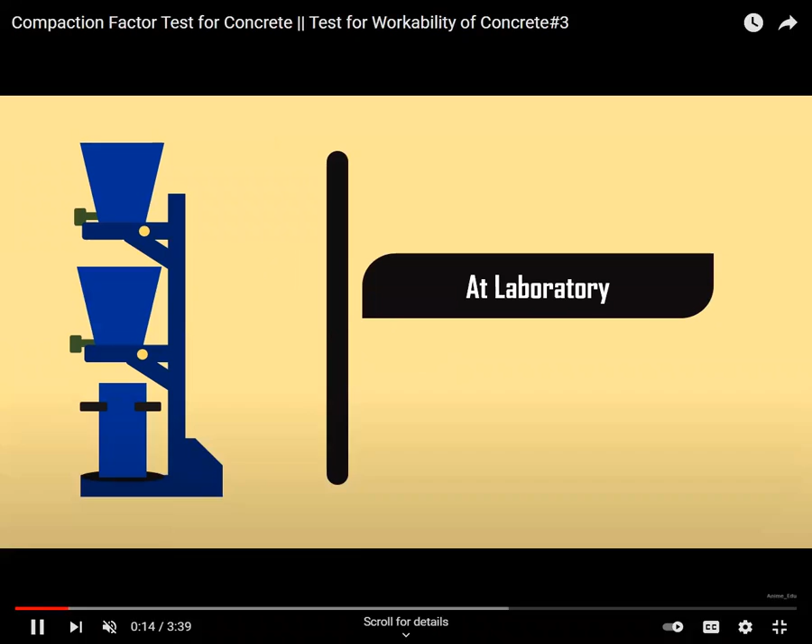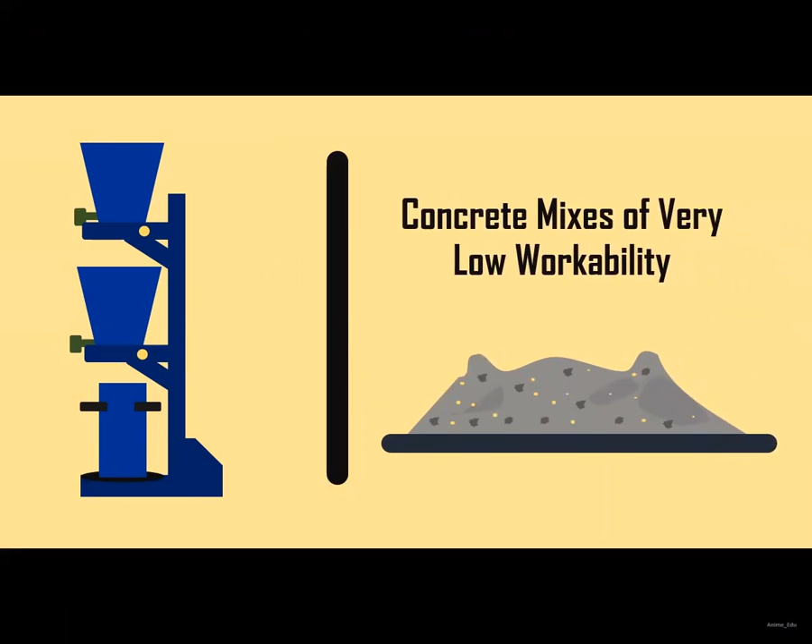This test can be conducted in the laboratory or at site. Before the procedure, let's see the different parts of the apparatus. Here you can see our compaction factor apparatus. First is the top hopper.

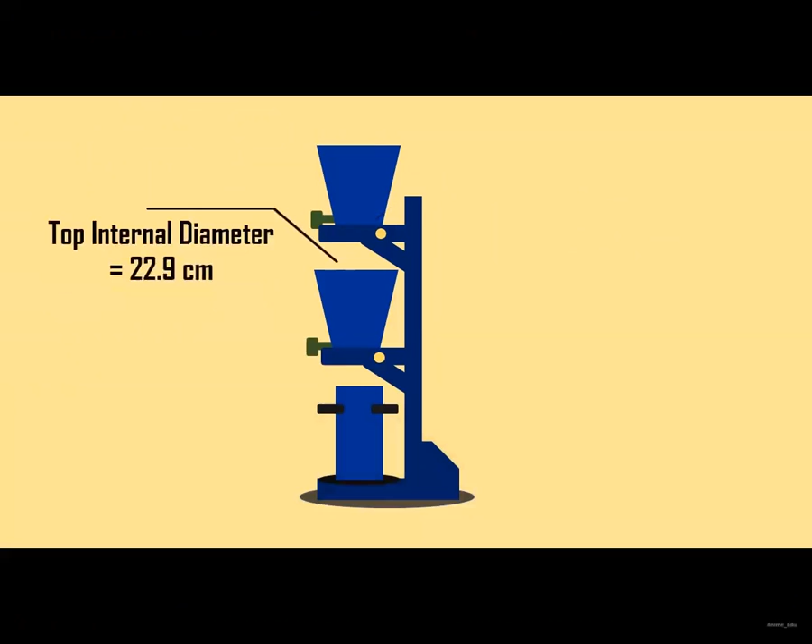Its top internal diameter is 25.4 centimeter, its bottom internal diameter is 12.7 centimeter, and the top hopper height is 27.9 centimeter. Next is the bottom hopper. Its top internal diameter is 22.9 centimeter, bottom internal diameter is 12.7 centimeter, and height is 22.9 centimeter.

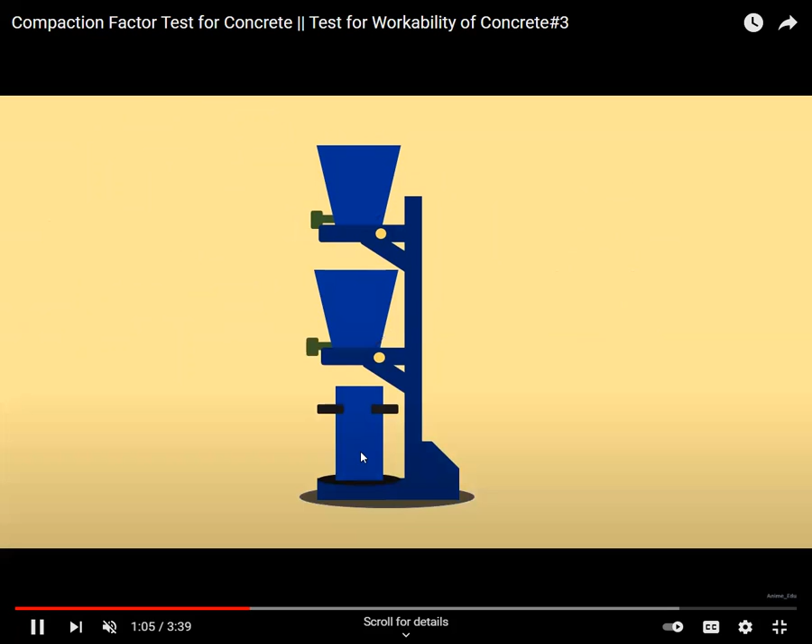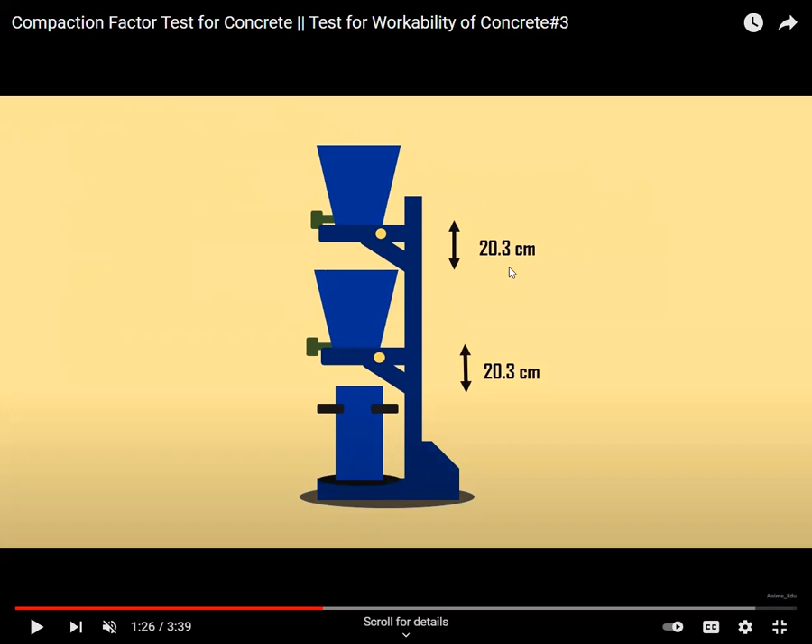The last is the cylinder. Its internal diameter is 15.2 centimeter and height is 30.5 centimeter. So this is our compaction factor apparatus: the top hopper, the bottom hopper, and the cylinder at the bottom. Here the trap door or release lever is given, and this is our base. The distance between the two hoppers is 20.3 centimeter.

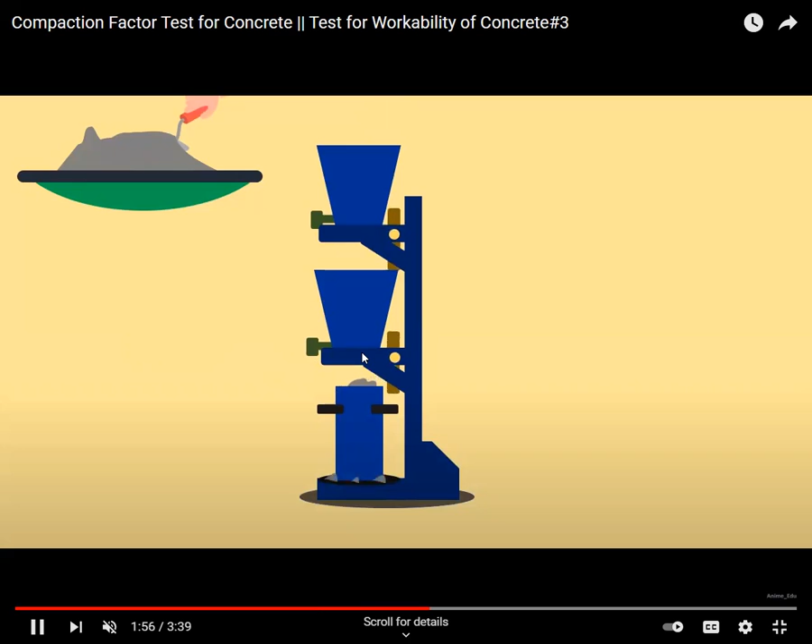The test is done in two stages. In the first stage, fill the upper hopper gently with fresh concrete, then open the trap door so the concrete falls into the lower hopper, removing stuck concrete gently using the tamping rod. Then open the door of the bottom hopper so the concrete falls into the cylinder. Cut the excess concrete using a trowel and level the concrete at the top of the cylinder.

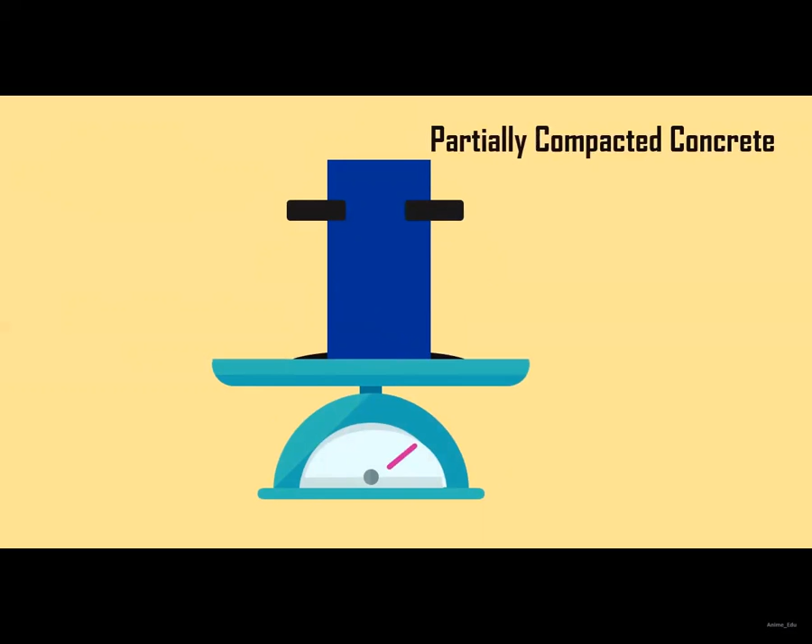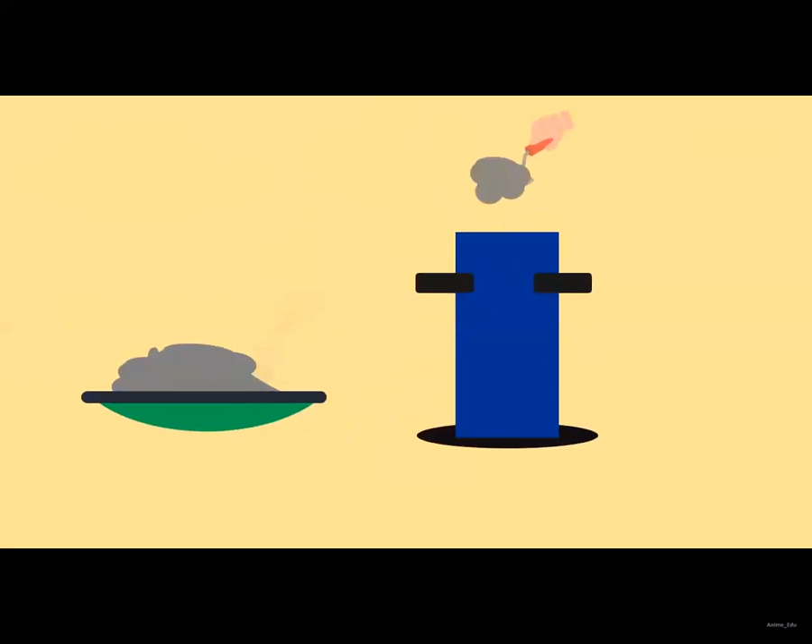Clean any concrete outside the cylinder and weigh it; that is W2, the weight of partially compacted concrete. In the second stage, the cylinder is filled with concrete from the same sample in 5 layers, and it must be compacted heavily using a tamping rod to achieve full compaction.

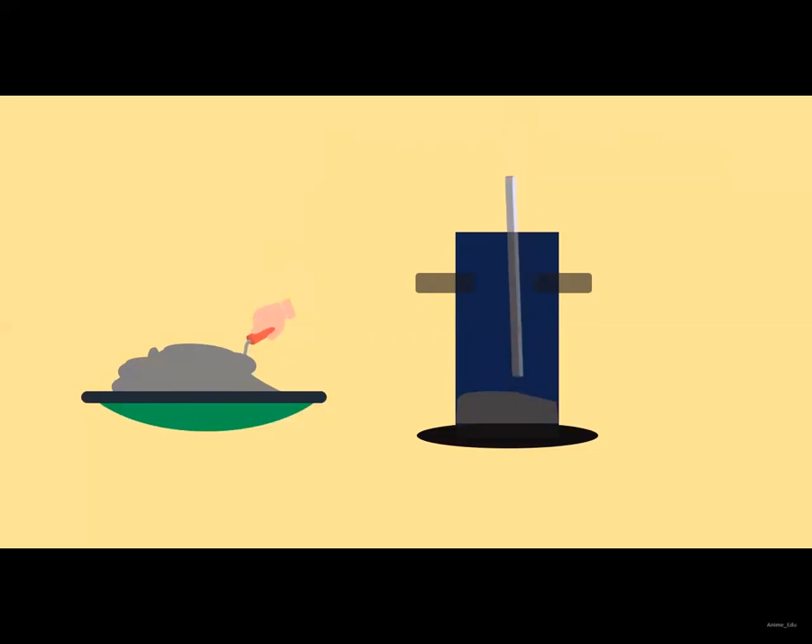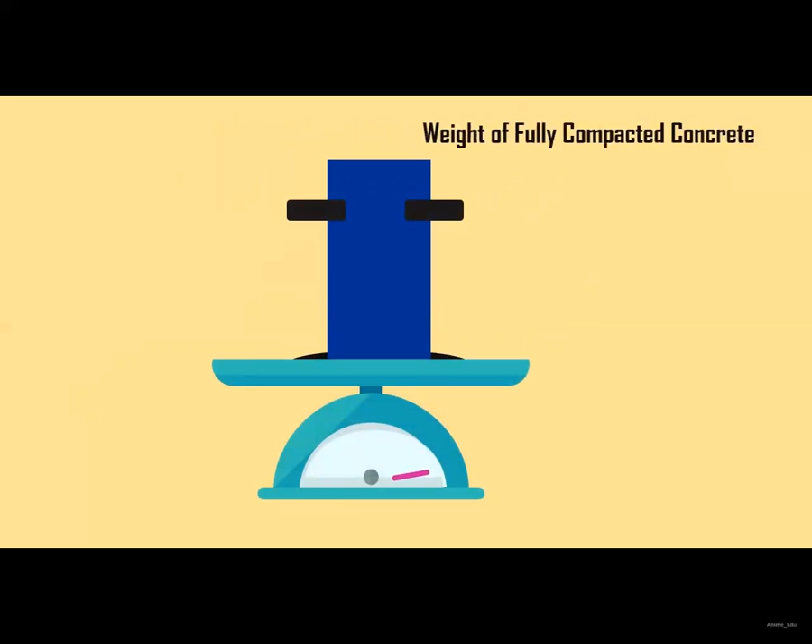Then the excess concrete at the cylinder top shall be removed and the weight of the cylinder measured. This weight W3 is the weight of fully compacted concrete, and W1 is the empty weight of the cylinder. Or you can directly find the compaction factor.

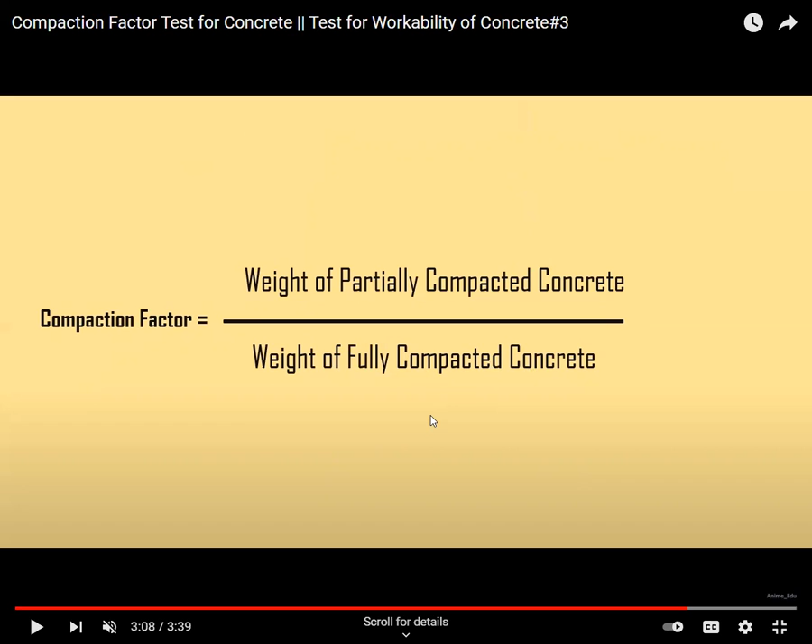Here is the formula to find the compaction factor: the weight of partially compacted concrete, which we found in the first stage, divided by the weight of fully compacted concrete from the second stage. From this formula we get the compaction factor.

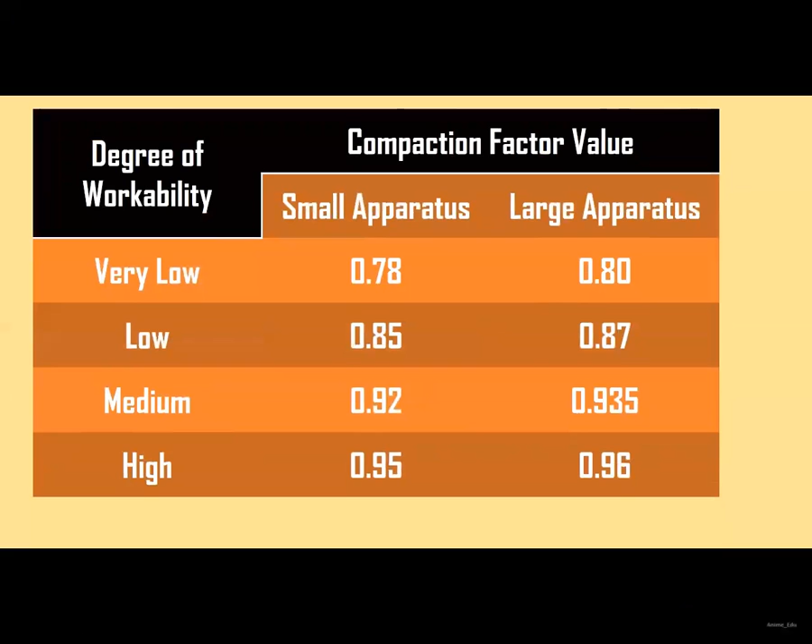Here is a chart. The first column is the degree of workability, and the second column is the compaction factor value for small apparatus and for large apparatus. For very low degree of workability, the compaction factor for small apparatus is 0.78 and for large apparatus is 0.80.

For low workability, the compaction factor for small apparatus is 0.85 and for large apparatus is 0.87. For medium, it is 0.92 for small apparatus and 0.935 for large apparatus. For high workability, it is 0.95 for small apparatus and 0.96 for large apparatus.